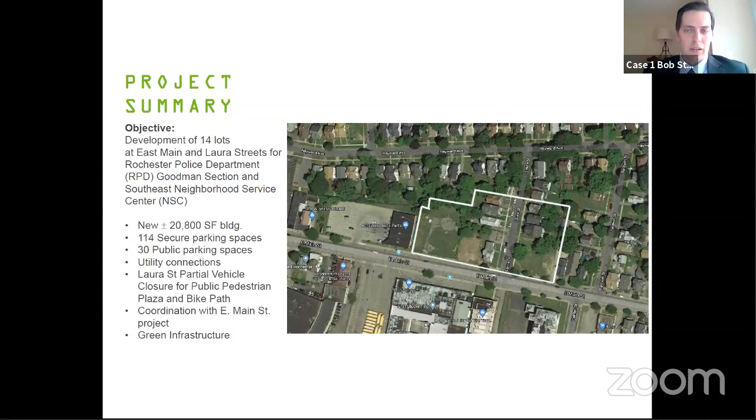The western portion of the site, right next to AutoZone, is a brownfield. So that kind of describes the site. If you can go to the next slide, Anna, I can start to talk about the site plan.

So the purpose of this project is to turn the Rochester Police Department into a neighborhood beat structure to allow more community engagement with the police officers. This is the first section that will be turned into a beat center, the southeast section. We're proposing a new 20,000 square foot building just west of the former Laura Street, East Main Street intersection, northwest corner. Laura Street will be partially abandoned to vehicle traffic and will be kept open as a plaza and bike lane and pedestrian traffic through Laura Street.

The project will also involve new parking lots. 114 spaces will be secured for the Rochester Police Department and Neighborhood Service Center, for both patrol vehicles and personal vehicles. That parking demand analysis was established early in the project to allow the officers enough spaces during a shift change. Those areas will be secured by a 6-foot tall decorative fence, both on the northeast corner secured spot, and then the area along the west and north of the building, west of Laura Street. There'll also be a public parking space on the southeast corner of the site, approximately 30 spaces open to the public, specifically for this facility.

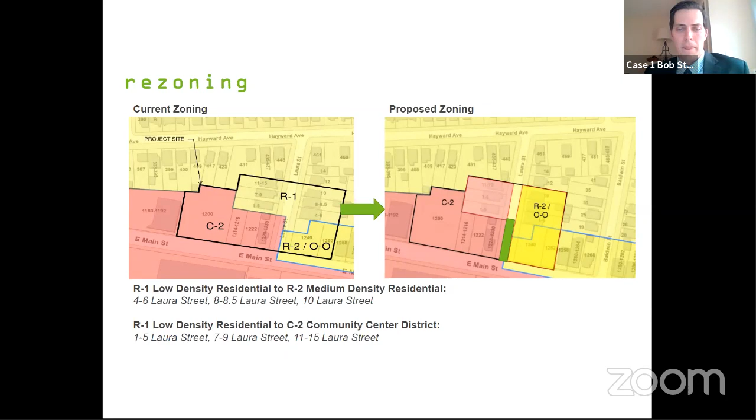So in a code review with zoning, we identified the front setbacks, side setbacks, all the code requirements for the project. Zoning identified some variances that will be required. I apologize, this slide is slightly out of date, so I'll read the preliminary findings from zoning.

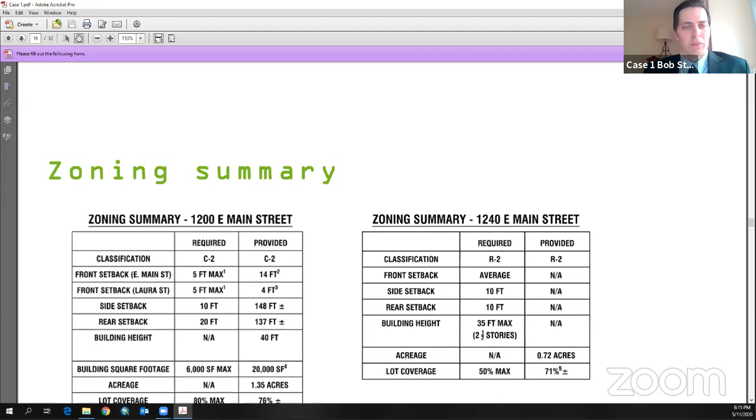The first variance required is a front yard setback, whereas code requires 0 to 5 feet, we're proposing a 13.5-foot setback along the frontage. This is to align the building with the other buildings on the north side of East Main Street. It also provides a public plaza area at the entrance to the building, more of a community gathering area in that location.

The next variance would be a minimum rear yard setback of 20 feet required by code. We're proposing 16 feet. Once these 14 properties are re-subdivided as part of the project, this variance will no longer be required. This will only be required before that happens, where the actual rear setback will exceed over 100 feet in the future.

The next variance proposed is building square footage. The programming for both the Rochester Police Department and Neighborhood Service Center required about a 20,000 square foot building, whereas code requires a maximum of 6,000 square feet. We worked with both the Neighborhood Service Center and the Rochester Police Department on that programming.

The next variance: all windows should be clear or lightly tinted. We have some opaque spandrel glass proposed for the project. The reason is, this being a police department, there are security reasons that would cause us to propose more of an opaque spandrel glass as opposed to clear. And then the next variance is a similar thing.

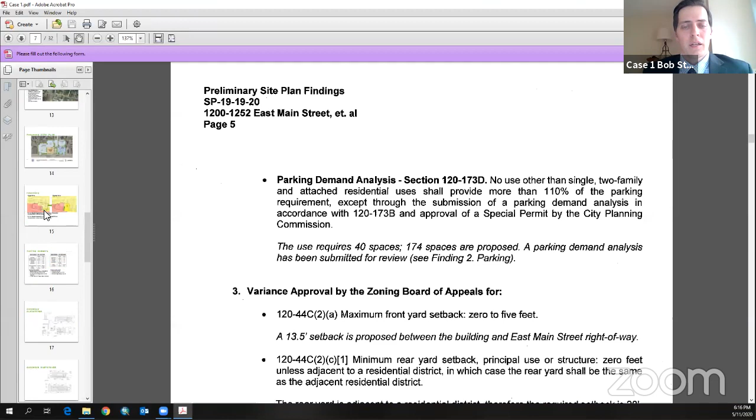The building is required to have 70% of the wall area between 2 feet and 8 feet from the ground to be open glass. We are proposing 52% transparency. We worked with the city to maximize that number to get it as close to the zoning code as we could. Again, it's a security thing — all the glass has to be bulletproof and rated, so it's very, very expensive. That's the variance we're asking for later on in the project.

Again, tonight we're only asking for the rezoning of the 6 properties on Laura Street. We'll be going before the zoning board for the variances and then back to Planning Commission for the ancillary parking lots east of Laura Street.

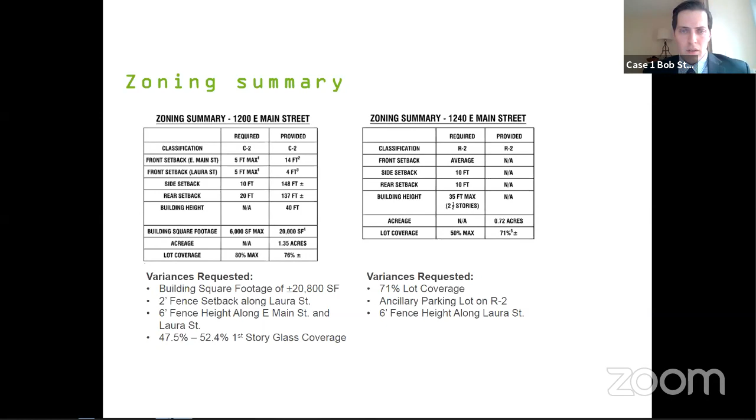Next slide, please. I'll have Tom talk about the exterior elevations, a little bit about the building.

All right, so hopefully my dog will remain silent. Tom, for the record, could you just give your name and position again?

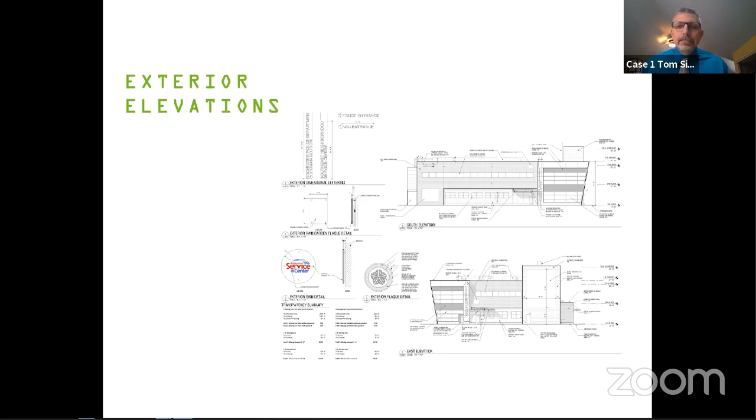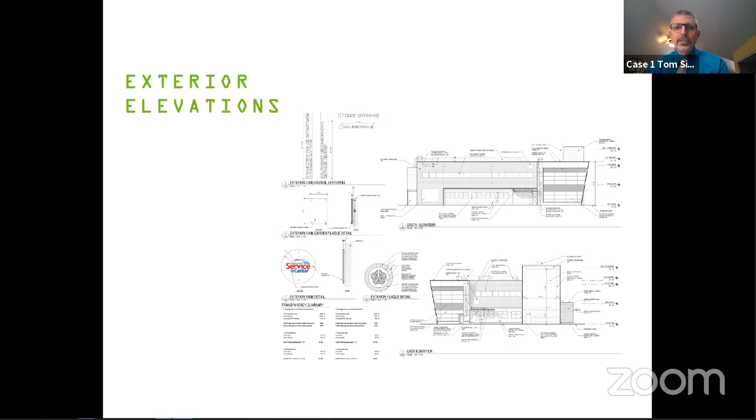So what you see here are the south elevation of the building and the east elevation. The southern elevation faces East Main Street, and the east elevation faces the Laura Street Plaza. The building is primarily a brick, clay brick, buff color brick. We have accent polished CMU for the stair tower and a water table around the building. We have some resinous HPL panels, some are faux wood and some are color.

So the color is around the large glass sloped curtain wall structure that you see in the southeast corner of Laura and Main Street. We show some signage here. There's really nothing else to show.

We have the transparency calculations, which again probably is hard to read, but as Bob Steeler mentioned, I think we're at just over 52% transparency from 2 to 8 feet. The windows on the first floor do extend to 9 feet, so we actually have a little bit more transparency if you were to consider that — I think it's another 2 or 2.5%.

We did go to the project review committee and we modified the amount of glazing on the facade on both the Main Street and the Laura Street facade to accommodate some of their comments and to get additional glazing into the building. We were unable to — one of the comments was to lower the glazing. Right now I think it's at a 5-foot sill height or a 4-foot sill height, on the first floor and the second floor, and the reason why is security concerns, of course, with it being a police station and offices.

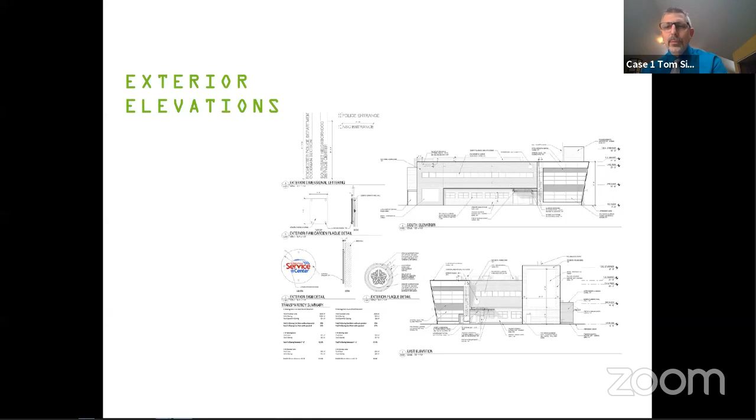So we elected, with review of RPD and NSC, to leave the sill height of the windows up higher. Next slide.

This is the north and the west elevation. The north elevation faces the parking lot area, the secure parking lot area for RPD. This again is primarily buff brick with accent HPL wood grain panels.

All of the glazing throughout the building is also clear anodized aluminum with a light tinted, blue tinted glass. There is some spandrel glass, as Bob mentioned, to hide some of the structure.

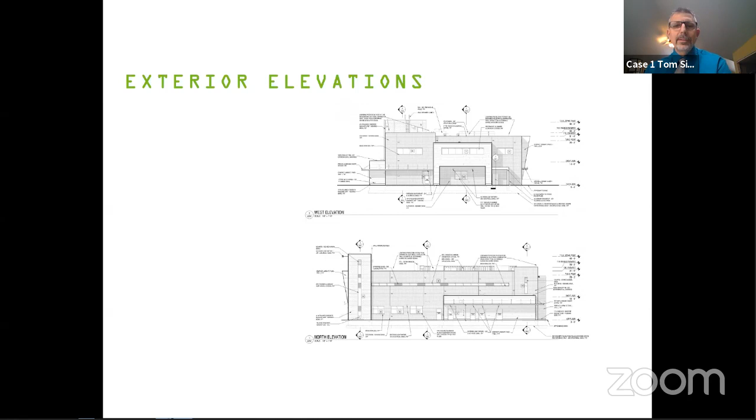I think we can probably see that better in the renderings, so maybe if we just go to the renderings next. So this is the rendering from East Main Street.

It actually shows there's a simultaneous project going on with the East Main Street revitalization corridor. So the rendering actually depicts some of the improvements that the East Main Street project will incorporate, like the bike path and changes to the median.

So this is looking northwest. This is the main entry of the building. The sloped glazing that you see is a stacked set of community rooms, one is NSC and the other is an RPD training and community space. So we tried to bring as much glazing into the building as we could to accommodate some of the transparency requirements that zoning includes or requires.

The blue is the resinous panel. It's a similar panel that you see in some of these first floor recesses, both on Main Street and the Laura Street side. That's a wood grain resinous panel. And again, the whiter tan material is the clay brick, and the stair tower is the polished CMU.

We do have the plaza showing the pedestrian plaza. So we've got a monument sign, we've got our flag poles, public seating area and gathering space there as well. Probably next slide, I guess.

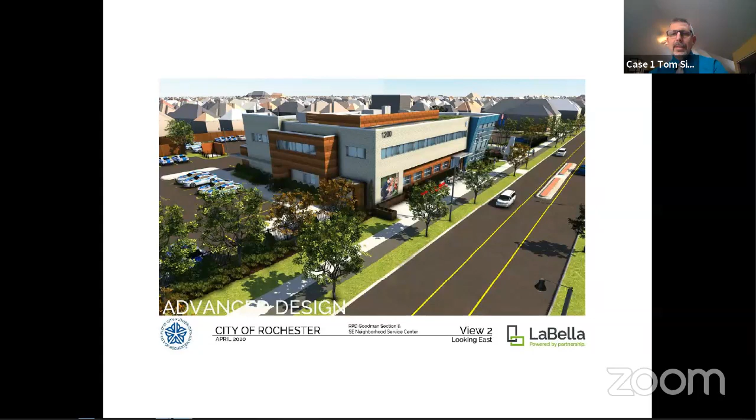And of course, we have several meetings along the way here with the city to get through zoning and planning approvals, this being the first one. We have a rezoning meeting, assuming approval here tonight. This would then go to City Council for June 16th, then Zoning Board of Appeals on June 18th, and back to the Planning Commission here on July 13th to deal with the ancillary parking lots.

Once approved and bids awarded, construction would start hopefully around September 1st of this year, and would finish about 15 months later, January, February 2022. And I think that completes our presentation.

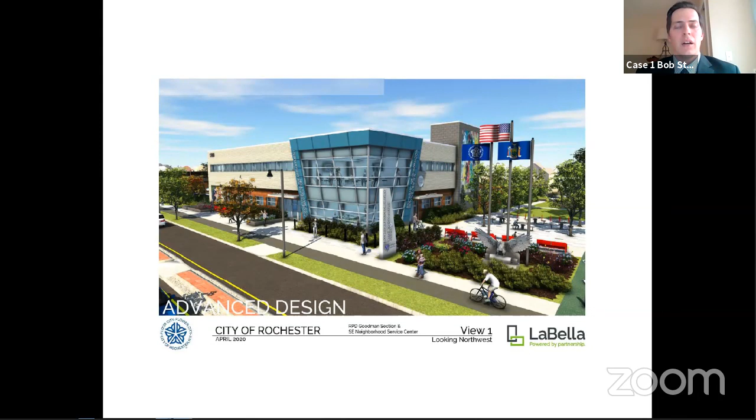Eventually the 14 properties will be re-subdivided into 2 properties - one west of Laura Street, one east of Laura Street. The property west of Laura Street would be one zoning district, C2, which some of those properties already are. The properties east of Laura Street would be R2, and some properties east of Laura Street are already R2.

Thank you, that's it for me. Any other questions for the applicant? I do have a quick question.

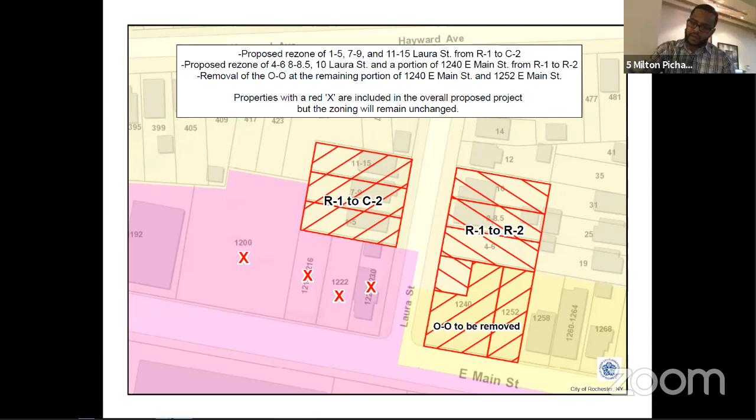I noticed your schedule is a little aggressive. Is the grant you're going to receive attached to the schedule? Due to COVID-19, do you think you will start construction in September and finish by January or February? If the grant is not attached to the schedule, that's fine, but I know you mentioned you may get some type of funding.

I unfortunately don't have an answer to that. Maybe Lillian does, but I know this is considered an essential project. So we were able to design the last 2 months through COVID to get to where we are, which is the bid documents. This will go out to bid just like it would before COVID, being an essential project, and we may actually get better numbers because of it.

As far as the grant, I'm not really sure. I know the grant has been awarded. At this point we'd have to show our conformance with the grant, and that's mostly engineering. All right, very well. Thank you.

Any other comments or questions for the applicant? I have a question.

I see that Laura Street's being left basically as a back entrance/exit for the parking, and it's basically a residential street, a dead end street at that point. I'm curious about why that's being done, and why maintaining the width of what was the street all the way through the site, and then needing to get variances for setbacks for the parking.

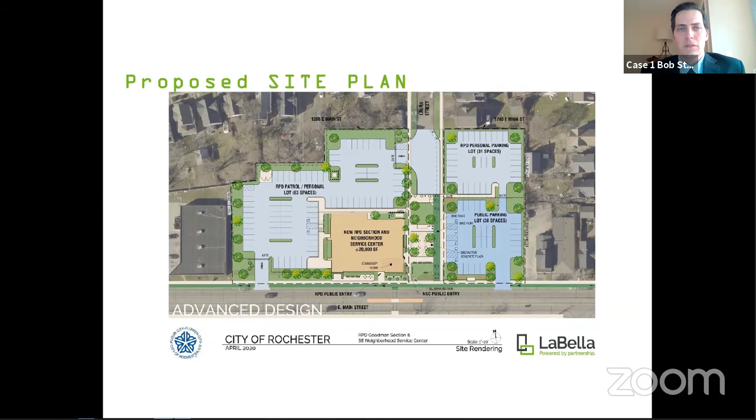Okay, thank you. Any other questions for the applicant?

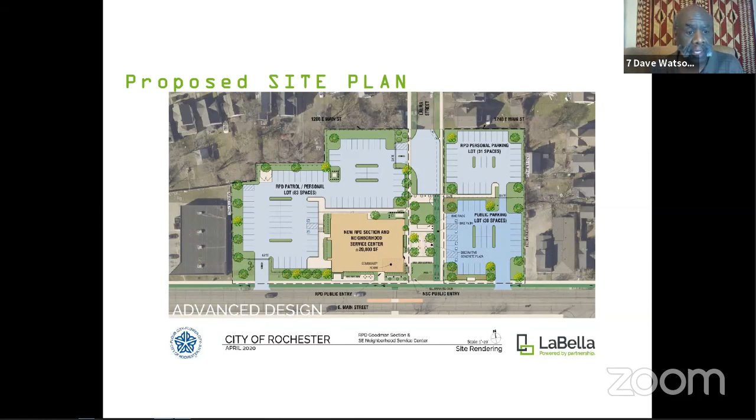Seeing none, this case is closed. May we have the next case, please? Sure thing. Just a note, there were no comments received. The case is closed just because we did not receive any comments in favor.

Oh, in opposition, sorry, I went too soon. I'm glad we're keeping on track. Anna, can I just ask, so there were no comments and none in the staff report, right? That's correct. At the time of publication there were no staff reports, and as of right now there are no comments. Okay, thank you.

Okay, so case number 2, this is file number OMA 05-1920. The applicant is the city engineer of the city of Rochester. This is a portion of Laura Street, and all present commissioners have visited the site. So we have Donna Clements here to present on behalf of this project.

I will swear Donna in. Donna, do you solemnly affirm that the testimony you're about to give in this hearing is true, the whole truth, and nothing but the truth? I do. Thank you, you can proceed.

Hi, my name is Donna Clements. I'm a civil engineer with DES Street Design, and I'm here to request that you recommend an amendment to the official map, which would prohibit vehicular traffic on a portion of Laura Street. This would allow us to create the pedestrian plaza. And that is about it. Do you have any questions for me?

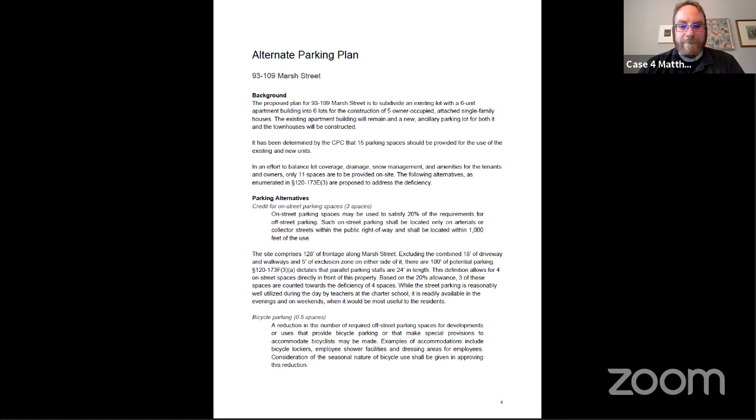If you could go to page 7 in the staff report, this is the revised plan. The basic layout of the site has not changed. It's still the existing 6-unit building on lot 1, and still the 5 new lots on the north side of the property for the 5 townhouses. But there were 4 major concerns that came up in that hearing.

The first was vehicular, pedestrian, and bicycle circulation. In the original plan, on page 10 of the staff report, there was solely a 12-foot driveway, which kept a 3-foot sidewalk that was already existing on the property. You can still see the remainder of it along the north side of the existing building on lot 1, but this used to extend further out into where the driveway is now and then to the street. We're going to eliminate that.

The paved asphalt portion of the driveway will remain 12 feet, but we've added level 3-foot sidewalks on either side so that when just a car is using the driveway, it's used as normal, and pedestrians are encouraged to use the sidewalk, walking up to either the townhouses or apartment building. If a resident needs to stop to unload while another car is coming and going, they can use that additional space to navigate around one another in rare conflicts. This gives a lot more paved area, makes it easier to drive around one another, and is more inviting to pedestrians on both sides.

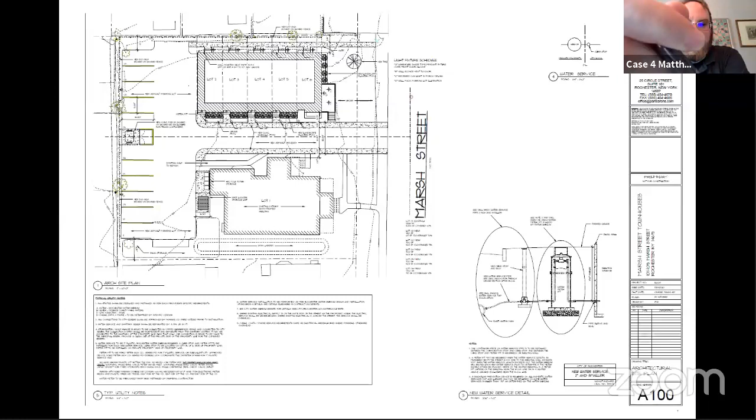The second major comment was about lighting. We didn't change the lighting — we thought it was pretty good to begin with — but we've called it out explicitly here. Above where it says Marsh Street vertically, there's a light fixture schedule labeling all the lights. There's lighting on the front and rear of each townhouse, plus 2 dark-sky compliant lights in the parking lot, one for each half to cover it. There's also an existing security light facing what's currently the rear yard, but will be the parking lot, mounted on the back of the existing apartment building. That light is staying — we're not eliminating it. It's not labeled here because it's not something we're building, but it's there and won't change. So we didn't really change the lighting, but called it out explicitly so it was clearly there.

Another piece of feedback was regarding parking availability. We've worked hard to balance the available on-site parking with on-site snow storage, as well as on-site drainage and open space. Unfortunately, we haven't been able to add any additional parking spaces on site at this point. We could add another space or two at the expense of having nowhere to put snow and nowhere to drain. So balancing all of that, we couldn't add spaces on site, but we did an evaluation based on guidance from the city zoning regarding an alternate parking plan. There are 4 spaces available on the street in front of this lot.

We are told to count 20% to cover the deficiency, so 3 of those 4 spaces would count towards this. We've also added bike lockers to the site behind the existing building on lot 1 to account for another half space.

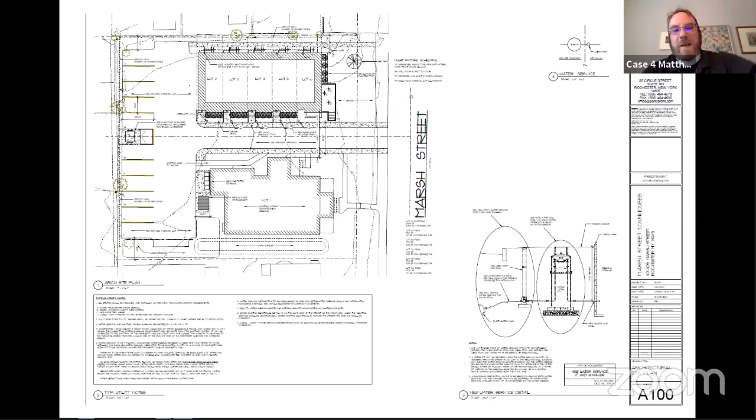Got it, but it's on lot 1. Okay. As are all 5 parking spaces on the north side of this property. Got it, thank you. Yeah, no problem.

Any other questions for the applicant? Hearing none, thank you sir. This case is closed. Oh wait, real quick.

Yes ma'am, we do have some comments that I will read. Oh okay, I'm sorry, I forgot to ask about those. No worries. Before I go into the comments, I do want to go on record saying that we do have 2 alternate CPC members with us this evening. They were not present at the original hearing, but they did listen to the recordings from that hearing, which makes them capable to review this proposal.

So Dave, do you want me to read the ones in favor first or the ones in opposition first? I forget, usually it's in favor then we'll do opposition. Okay, great, thank you. So for the 93 Marsh Street project, there were 5 comments included when the staff report was published. Outside of that, we received 5 additional comments, 3 in favor and 2 in opposition. So I will start with the 3 in favor.

This is from Robert Williams on Friday, May 8th, 2020. I'm writing regarding approval of special permit in case E-21-19-20, a proposed 5 attached single-family dwellings townhouses as part of the 93 Marsh Street project. The CPC's objection is in large part to the proposed 11-space shared parking area between the 6 created lots on site. The CPC believes that 15 parking spaces must be provided on-site to serve a total of 11 on-site housing units.

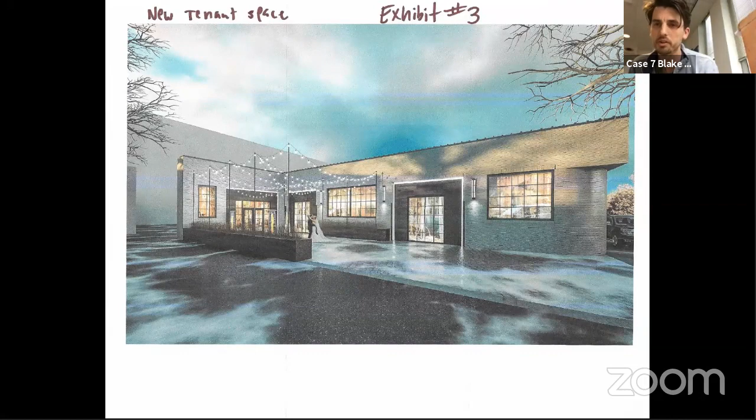There we go, and could you show what it currently looks like also? There's another one right there - that's what it looks like currently. Now could you go to the plan from McMahon LaRue that shows the changes?

Since I am legalizing my existing lot only, we had to make a number of design sacrifices.

We had to reduce the number of parking spaces by adding an entry off of Alexander, snow storage, and 45-degree angled parking. Our lot on its own is not wide enough to be approved for two-way traffic, with enough space for cars to turn around safely.

The one-way traffic will exit through the existing driveway between 727 East Main and 731 East Main. We own both 727 East Main and 731 East Main.

While working on this plan with Greg McMahon from McMahon LaRue Associates, I contacted and met on site with John Lembeck of Park Meigs Association, Sunshine Jacobs from ACE, and Charlie Peterson of 407 Alexander.

He is the only residential neighbor. I was also able to speak on the phone and correspond via email with Evan Lowenstein of Neighborhood of the Arts and Jesse Noth of Southeast Area Coalition.

The only two people I reached out to that refused to meet on site are the two people that have written letters in opposition. With input from these related parties, I believe we have come up with a safe, responsible solution that involves very minimal changes from the current existing lot.

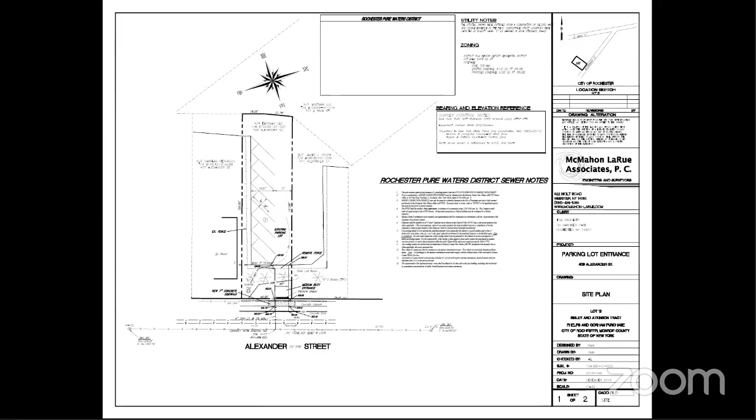And let me ask this - is the one-way traffic relying on a parcel other than 409? The exiting traffic relies on an existing path between buildings 727 and 731 East Main, and I own both of those buildings. Okay, this is one thing where we probably would require, as a condition of approving this, that you provide an easement. The staff report says I will be required to submit an easement. Okay, I wanted that clear in the record that you're willing to do that. I will be, yes. Okay, thank you.

I have a quick question - are you proposing any lighting for the parking lot? I didn't see it on your site plan. And if you are, we'll get those lights addressed. So that was part of the presentation.

I met with Charlie, who's the residential neighbor, and he actually parks in that lot, and I'm reaching an agreement where he probably will continue doing that. He says there is a utility pole with a big light on it already on the existing lot, and that provides ample lighting. I met with him on site, showed him pictures of what we are doing to the building - the back of the building will be lit up. He felt comfortable with the design, and that was what we submitted.

Have you done a lighting study? He said that it's good, but do you know for sure? When you say lighting study, what do you mean exactly?

So if you hire an engineer, you'd see if you have one pole, if that's going to be enough. It seems like it's going to be pretty dark if you don't have any type of lighting, unless you put it right into the building like you have on your rendering.

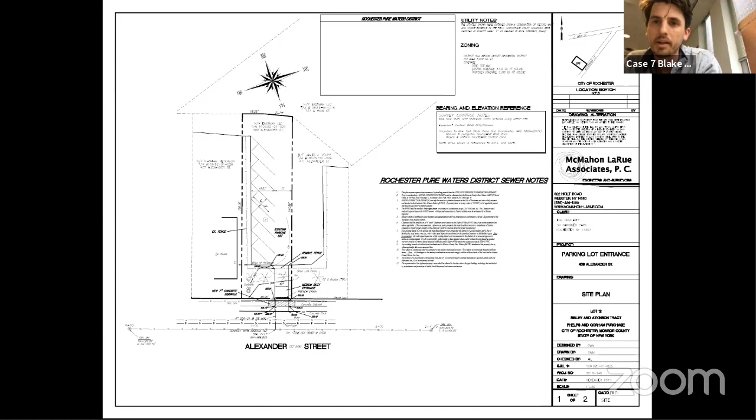We have lighting that, as you're seeing, will go to the back of the building. That's how the building's going to look, and the utility pole does provide quite a bit of lighting to the building. We did have Greg McMahon help us design this project, and with the spots, didn't think it was necessary.

Okay, thank you. All right, any other questions for the applicant? Thank you. Anna, any comments that have come in since the staff report?

Yes, so as you know, there were 2 comments received or included with the staff report. Outside of that publication, we received an additional 4. So I will read those to you all right now.

The first one is from the Ace neighborhood, specifically Sunshine Jacobs, received Sunday, May 10, 2020. Dear members of the Planning Commission, we are aware of Mr. Giannini's application for a driveway to Alexander Street to allow access to the existing parking behind his property on East Main Street. We are writing in support of his petition.

In February, we met with Mr. Giannini at his property. We discussed his plans and looked at various options with him. We were delighted to learn that he had already had planned tenants. All of the plans he discussed with us seemed to offer a significant enhancement to this stretch of East Main Street.

And mesh nicely with the entertainment district of which it is a part. While this property is west of Ace, it is adjacent to our neighborhood. What happens in adjacent neighborhoods affects all of us, especially along commercial corridors. We are in agreement with Mr. Giannini that there is no better or other solution than the one for which he has applied. It would be fruitless to create the sort of venue he has planned for the back of the building if there is no practical way to reach it.

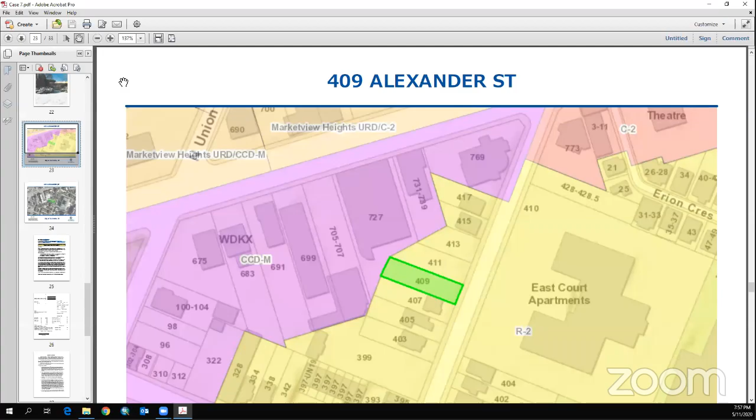So there are no easements on either the north or south parcels to the north or south of 409 Alexander. What we've been talking about is just easements to cross parcels on East Main Street. Currently there's no easement with 409 - he's free to create whatever easements he wants. The neighbor does not have any easements over his property at 409.

What properties? This is an ancillary parking lot for 409 Alexander Street. Tom, can you tell me what properties Mr. Giannini has to give us easements for? He's going to have an easement to connect 409. With the map up, it's easier - people will enter onto 409, park there, exit onto 727, which he owns, and then travel and exit through the shared exit with 727 and 731.

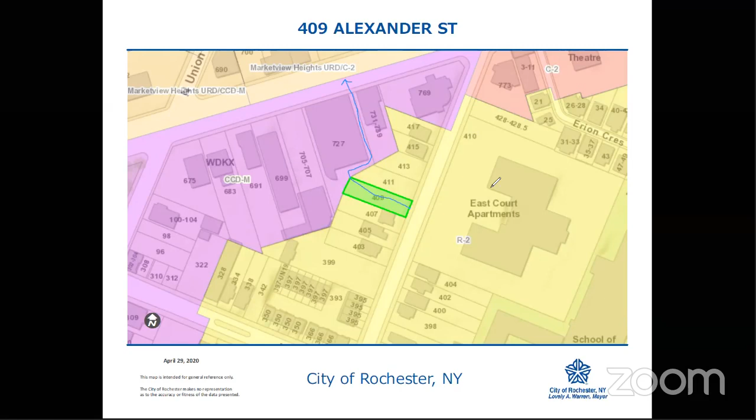So there's a shared easement required to another Giannini-owned property on East Main. What is that address? 731-739. Then the other easement, the old easement, has to do with 705 - that parking area. We're not dealing with that one. Thanks, appreciate it.

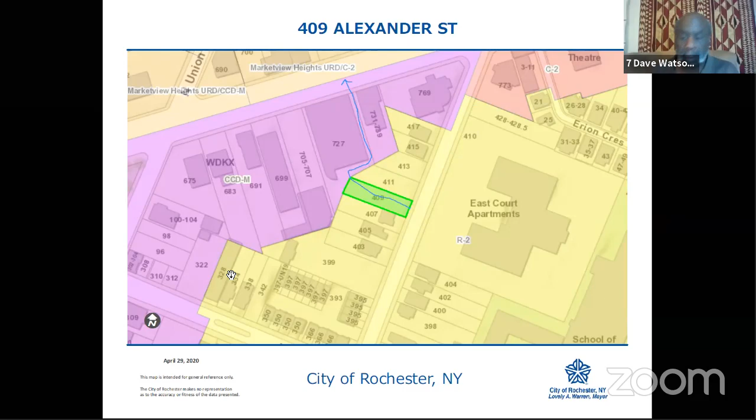Everybody up to speed? Any other questions? None. Then I'm going to thank you, Blake, for your presentation, and thanks to Paul. We'll end this application and call for the next application, please.

Let me get this annotation away. Good job. Okay, but now let's figure out if I'm technically savvy enough. All right. Yay. Okay, here we go. Last but not least.

This is case number 8, file number E-43-19-20. The applicant is Tanya Swallen. The address is 836-838 South Clinton Avenue. This is a special permit, and I'd like to go on record saying all present commissioners have visited the site.

Mr. Watson, you're muted.

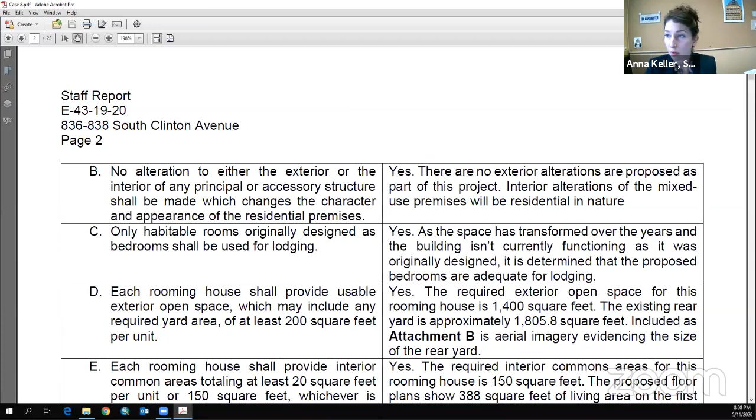Yes, so as you guys know, there were three comments that were included in the staff report, one of which was the one from the neighborhood association that Ms. Moses-Wallen acknowledged. Then outside of that, there were 3 additional comments, 2 in favor, 1 in opposition. So I will start with the 2 in favor.

This is from Lisa Reagan of 220 Linden Street. As an active longtime member of the South Wedge Planning Committee, I'm commenting on this request for a special permit that borders the South Wedge. The South Wedge has one of the highest concentrations of residential programs in the city. Many of them operate very safely and productively in the residential neighborhoods. Others have caused challenging problems for the residents and the neighbors. A residential house for children in need of supervision used to operate across the street from me for more than a decade.

As much as I supported the program, the residents of the house were sometimes at serious risk because of lack of appropriate supervision, as were the neighbors. The young people rotated in and out of the house frequently, making it hard to develop relationships with the neighbors and neighborhood. I support the proposed use with the proposed management. However, I agree with the South Wedge neighborhood's concerns. I would suggest that if the special permit requested is granted, that a condition be placed on the granting of a special permit that causes it to expire if the proposed use and management of the specific program as described ceases.